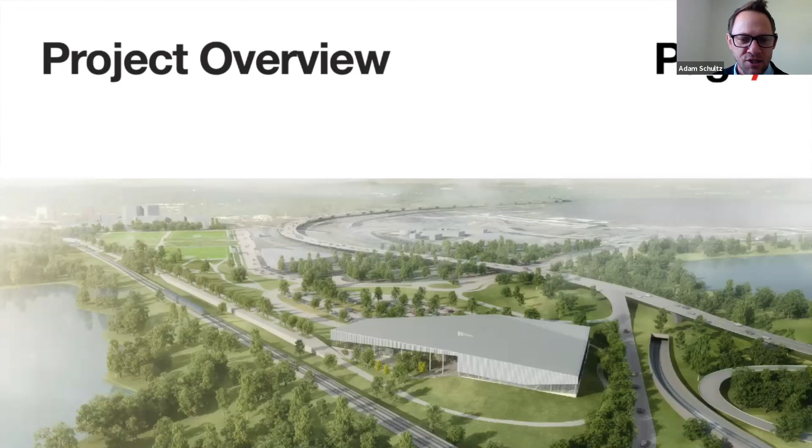Good afternoon, my name is Adrian Lazaro. I am an associate principal at Page and the project architect for the Long Bridge Park Aquatics and Fitness Center project, together with our design partners, MJMA from Toronto, and a great consulting team that includes Elliott Bryan, AMT Engineers, Hillis Carnes, Roadside Harwell, Schnabel DC, Limbach, and Water Technology Inc. We at Page worked closely with Coakley Williams as part of the design build team to deliver this very exciting project to Arlington County.

The project started with the owner's project requirements and a set budget. From there, we worked hard to provide this iconic facility, meeting both the project requirements and the limited budget, all in a very simple yet elegant design.

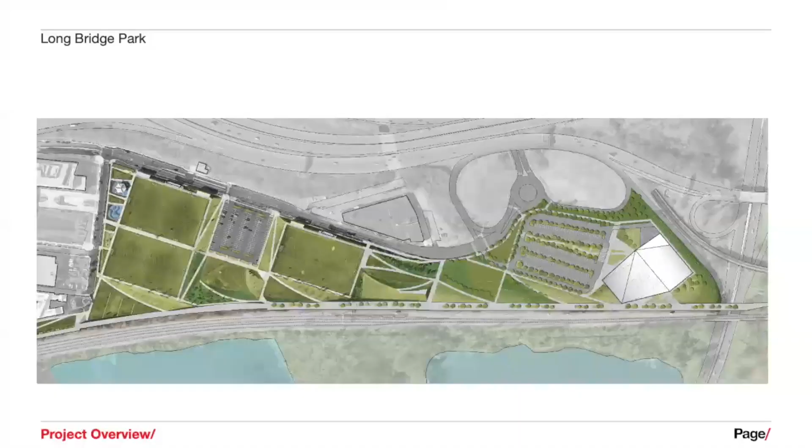The facility is situated at the north end of Long Bridge Park with approximately 92,000 square feet of floor area. It has a 50-meter FINA regulation pool at the north end of the building, perfect for everyone, from those who want to do laps to aspiring and current Olympic athletes who want to train. It has seating for more than 400 spectators.

Next to the pool is a spa for those who want to relax. At the south end of the building will be a leisure pool with a slide, a lazy river, and play equipment for users of all ages. It will also have a lap area in case you find the 50-meter pool too big.

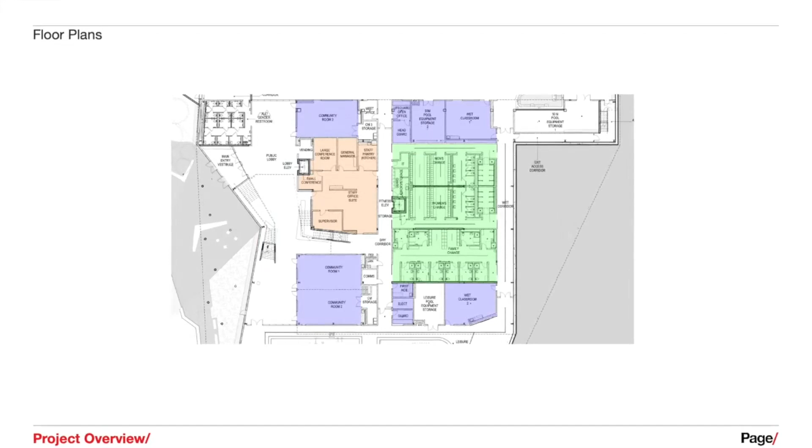In between these two pools are the admin area, change rooms for men, women, and family, pool support such as lifeguard rooms, storage, first aid, two wet classrooms, and three community rooms where you can hold small conferences, seminars, or parties. All three areas are connected via dry and wet corridors.

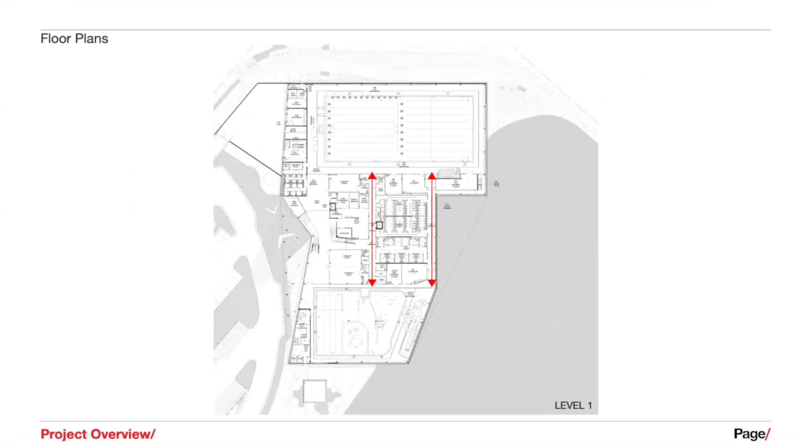Above this middle part of the facility is a fitness area which overlooks the leisure pool inside and views towards Reagan National, Crystal City, and the Pentagon outside.

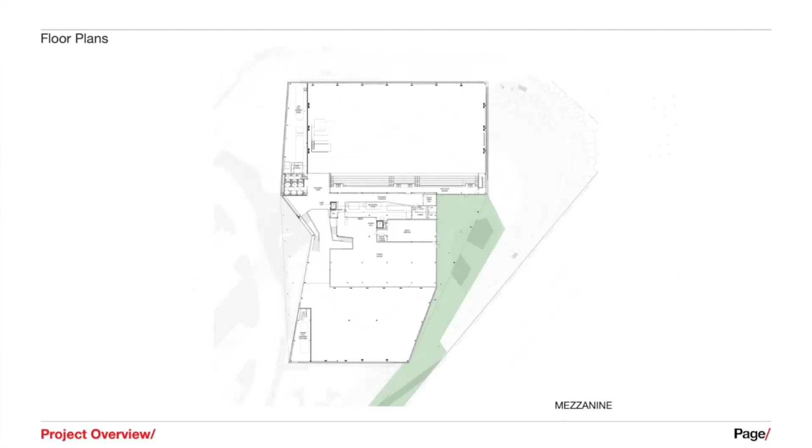The facility is an extension of the existing Long Bridge Park. While making that connection outside, we also brought it inside from the Esplanade to the Esplanade Corridor, where a timeline graphic and the rich history of Arlington County and Long Bridge Park will be located.

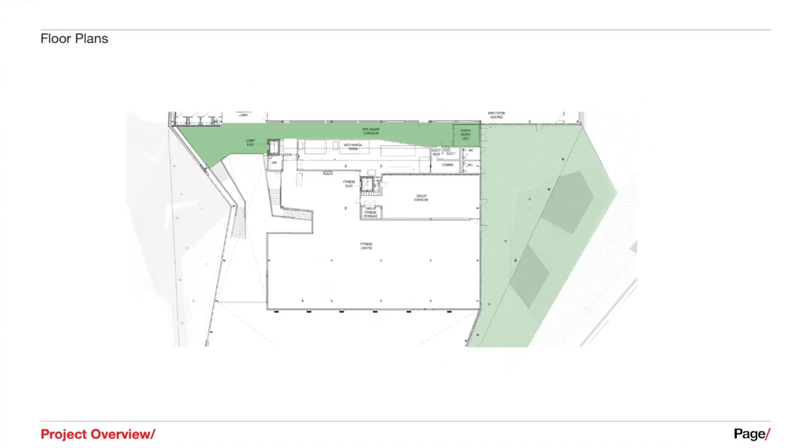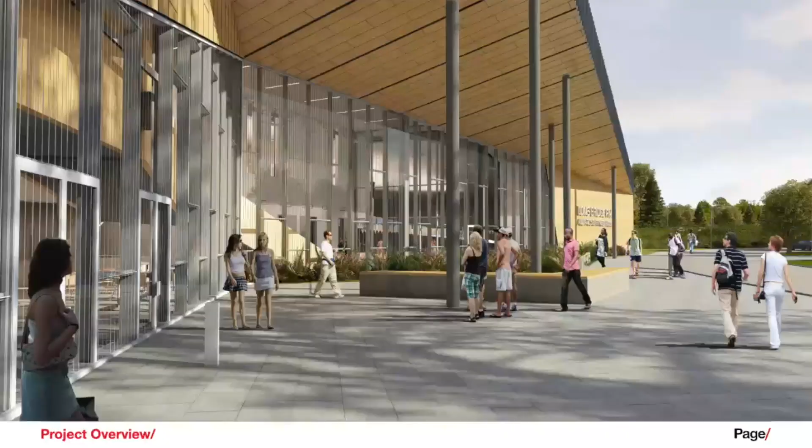The building materials used are very durable, simple, and aesthetically pleasing. At the exterior, we have predominantly metal wall and roof panels, with phenolic panel accents at the main and Esplanade entrances. The glazing is treated with fritting in a pattern that makes it bird-safe or bird-friendly glass. Yes, we did think about our little feathered friends in the design of this facility.

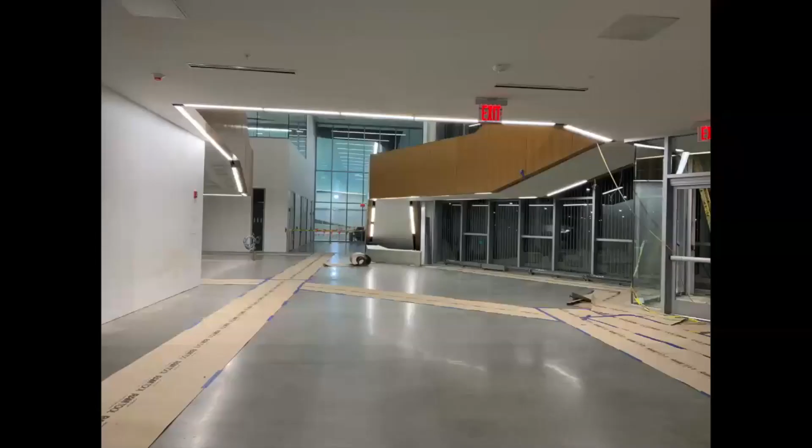Inside, we have barely any veneer finishes. Floor is mostly concrete, polished or brushed. The group exercise and fitness areas, though, have wood and rubber respectively to make it easier on users. Walls are mostly painted or exposed concrete. We have a few areas with tiled walls, such as the shower areas and all-gender restrooms.

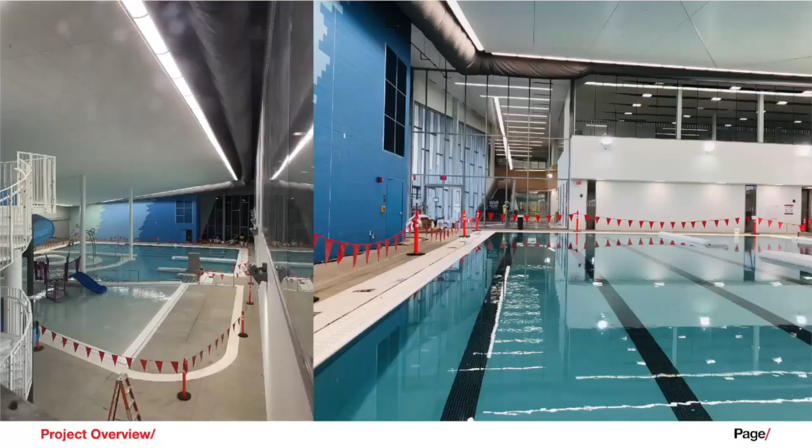But it's not all about aesthetics. We also had to take into account the humid and somewhat corrosive environment in the pools. That is why we have fabric ceilings and fabric air ducts with aluminum hard duct connections, for example. Exposed steel is galvanized or applied with high-performance coating. We also thought about limiting the effects of the corrosive environment by addressing air quality through the HVAC system.

You see, pools, when used, generate this noxious gas called chloramine, which is a reaction caused by the chlorine in the water mixing with ammonia, which comes from our bodies in the form of sweat, oils, and other liquids. That gas formed on the pool surface is heavier than air. Old pool designs had to return air low across the deck. But guess what? Trying to move that gas across the deck is basically ineffective, as users walking along the deck would disrupt airflow and make the gas go airborne.

That is the pool smell you smell in pool facilities, the same smell that reminds you of summer. So we source-capture that gas at the edge of the pools via the gutter evacuator system, and it is exhausted out of the building and not recirculated, because we know that better air quality means more fun for everyone.

So there you have it, the building in a nutshell. We are really excited about this project and we take pride in being part of making it happen. We look forward to seeing you enjoy this facility in the near future. Thank you so much.

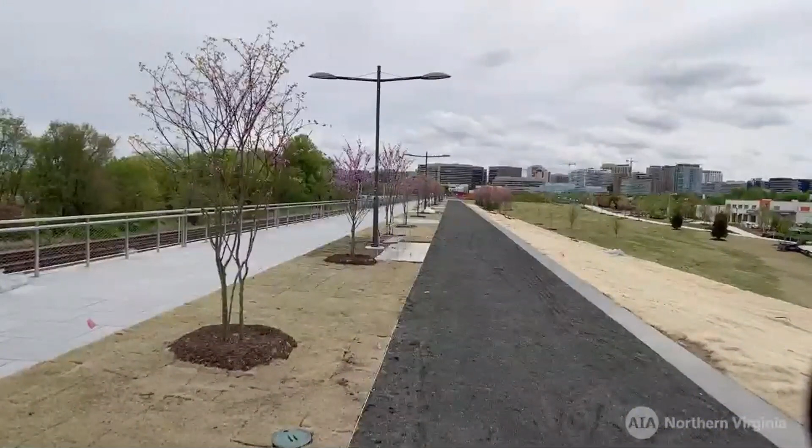What we had heard from the Long Bridge neighborhood committees was they wanted more park. They were excited about a building being here, but they wanted more park, and they wanted a passive park. The existing park is all about soccer, play fields, and noisy activities. Folks wanted to watch birds because of the association with Roach's Run. They plane watch, they train watch, and on some nights you get to watch fireworks, I suppose. So it was all about more passive engagement.

The idea was that there is no barrier between park and building, and the park seamlessly moves its way into the building. We saw that entrance as important as the front entrance because a different group of people will be coming in there—bikers, when they finish the overpass for pedestrians, that will connect both the District of Columbia and the George Washington Parkway.

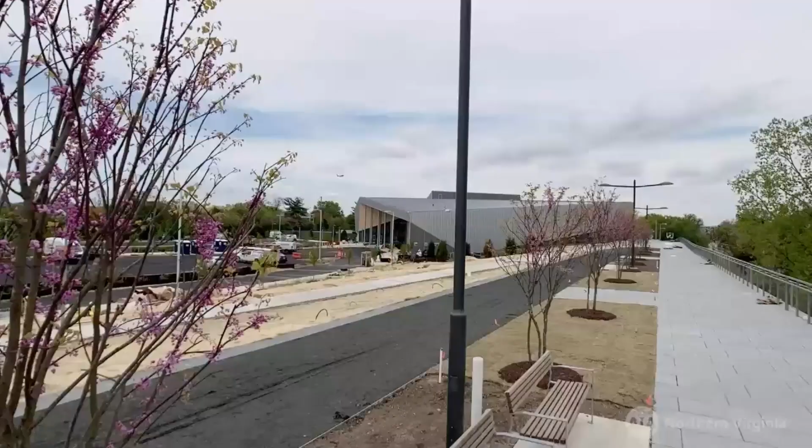When folks come in off of the Esplanade from way down at the other side of Crystal City, they just walk seamlessly and are guided, literally guided into the building by the landscape. It was a big driver in terms of both the appearance of the building and how it sits and nestles in. This place where we're standing is the Esplanade.

It's a very nice open space under a huge canopy. It connects to the park. There's a jogging trail, and you can see planes land and take off. It's very breezy. This is the favorite part of the project, for me at least.

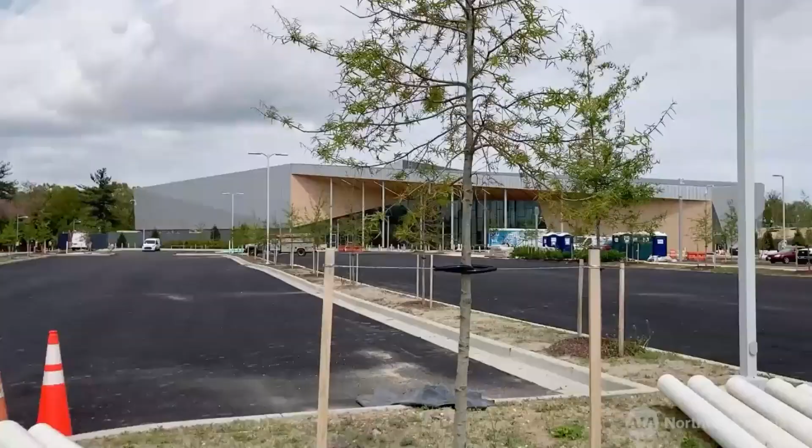Actually, it's when you drive in, the overall feeling that you get from the building. Because it sits away from you, there is a sense of entry. When you actually turn into the park and your car turns this way, you get to enjoy the building as you come in from far away.

The building has a lot of large-scale elements, and so while you can appreciate them up close, they really read when you're far away. You really get to see how we've pushed this front entry in so that you could enjoy the scale of the building.

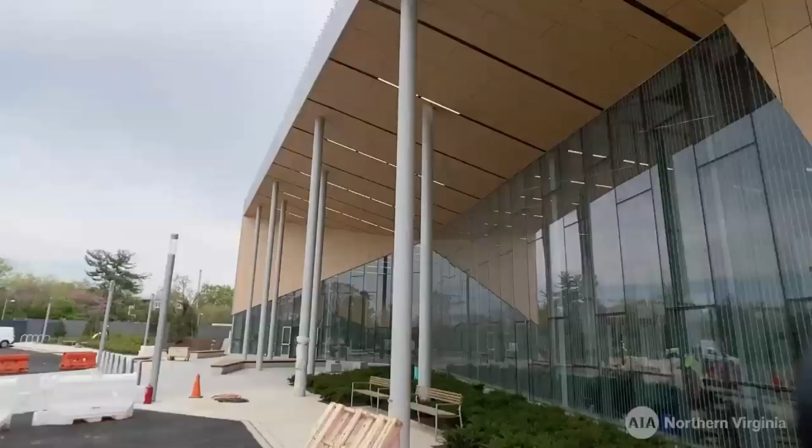There were early discussions about what the project wanted to be. But this was not really about architectural design—it was more about finding something that would resonate with the county. We knew they wanted an iconic structure. It's in an iconic location. We knew they wanted a civic feel to the building, and they had a lot of program that they needed to enclose.

We were walking the old site, but what we noticed about the existing park was that because they're playing fields, they're flat plains—not rolling hills. Everything was sort of in flat plains. And that gave us the inspiration for this idea.

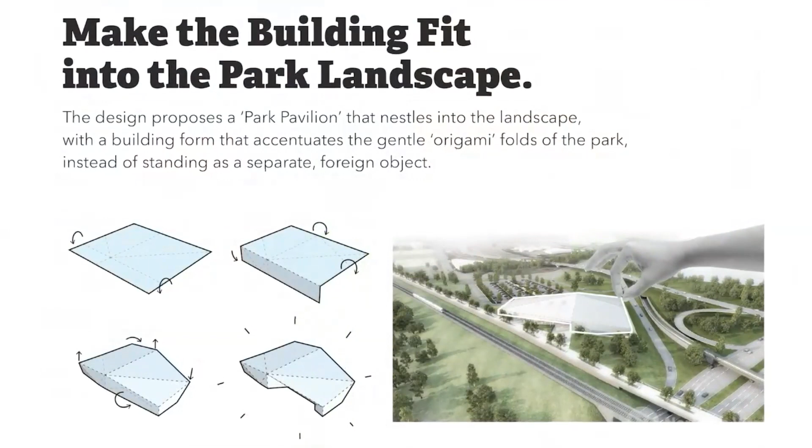They chose the notion or the metaphor of origami. For me, it was tessellated planes that we could pull the building up and out of the ground. So all of the geometry is really based on the building being a part of the park and sort of rising up out of the park. So the tessellated part, the origami piece, is important in the form of the building.

It guided everything—the shapes, the folds in the panel—what they're trying to do is recall the notion that it's being pulled out of the ground and being folded as it forms this large volume that holds both of these swimming pools.

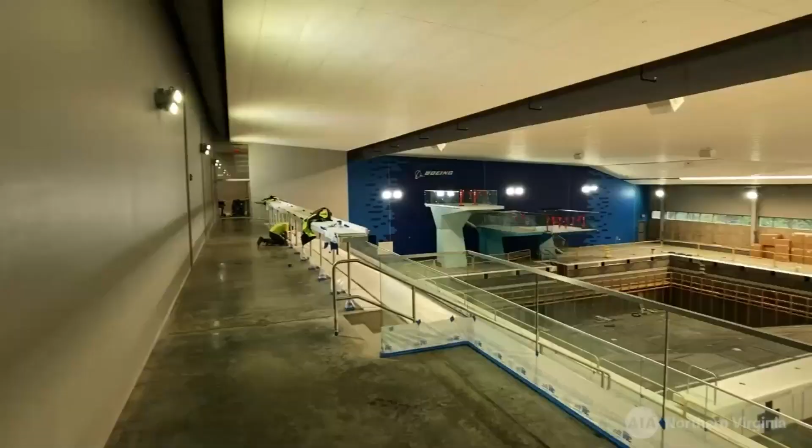With the pools, there's always another layer of complexity dealing with the exhaust systems, the finishes, just making sure everything you're putting into it is right for that environment—the chlorines and everything else. I thought that was an interesting part of the project. We worked very closely with MGMA, our team whose primary focus is pools, having discussions with them about how this finish might not work here because of the pool environment. I thought that was a very interesting part of the project that I definitely learned a lot from.

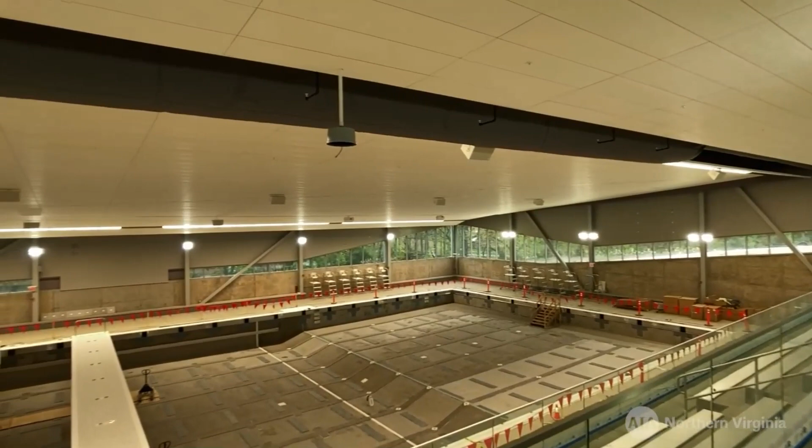I hope that it's a welcoming building, a building for the community. It's a community space—there's plenty of community spaces inside, community rooms, the fitness center, the outdoor areas connecting to the park. I would really love having the public embrace the building as part of their community and utilize it in their everyday life.

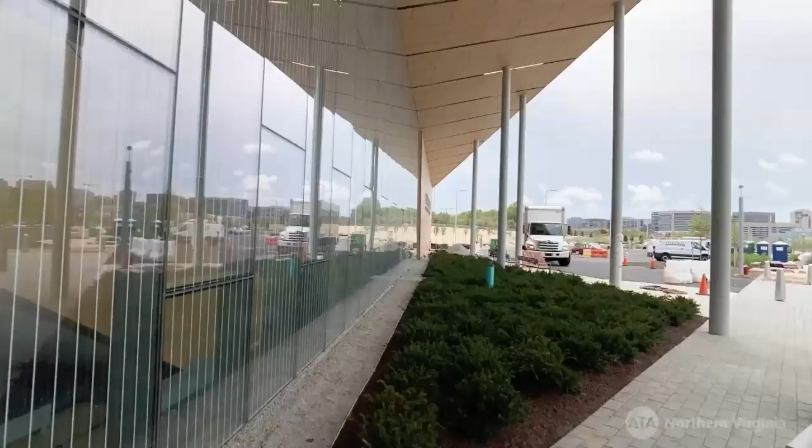If you look at the geometry of the building, there's a couple 90-degree corners, but not that many of them. Trying to get all of these to work with the metal siding, the phenolic panels, the curtain walls was a challenge, dealing with the different tolerances involved with those trades. That'd be a big thing for young architects to note: be cognizant of how much tolerance you're giving your contractor with your details. But we were able to make it work.

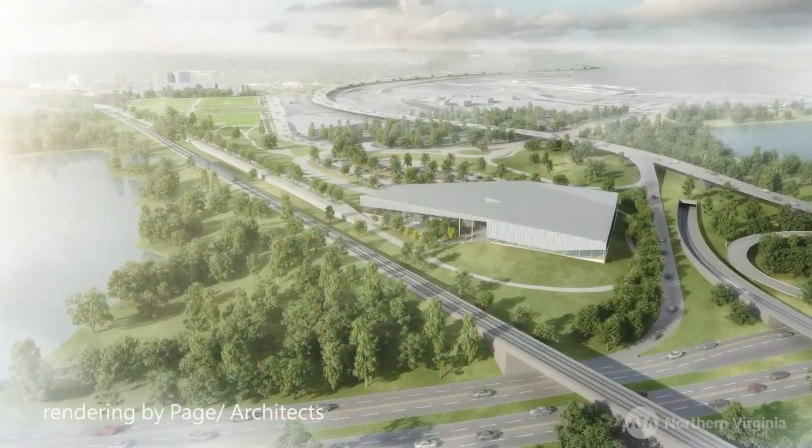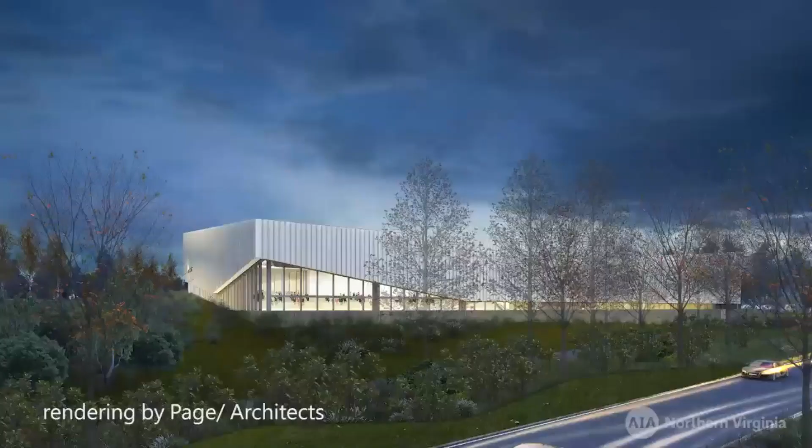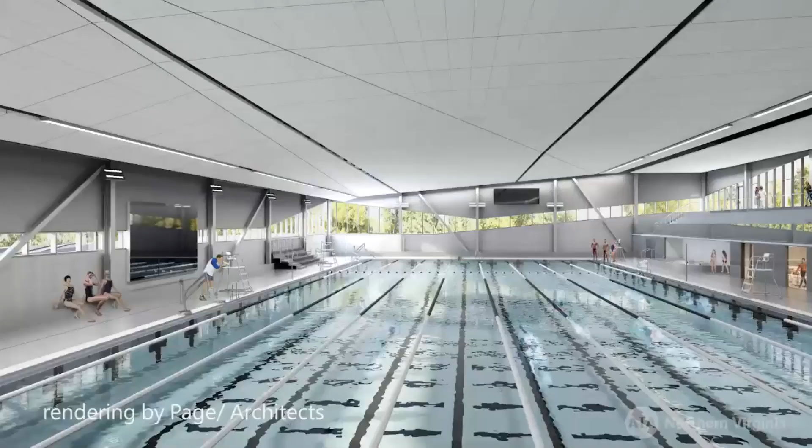The project had a long gestation period. We've gone through several designs for the Aquatic Center in this part of the park development. This one resonated because we wanted as much bang for the buck for public dollars, while making a statement with a modern facility the community could be proud of. It maximized the swim opportunities, health and fitness space, plus amenities like deck space, storage, and community rooms.

We didn't have to shorten or go light on certain things because of the simplicity of the design, yet it's a very appealing design as far as how it sits into the park and the building's aesthetic. What I would hope people would enjoy is the absolute simplicity of the building.

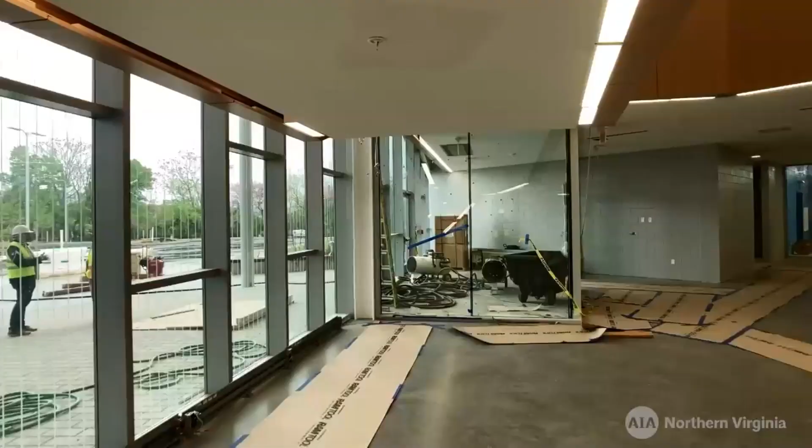There's not a lot going on, not a lot of moves, not a lot of ornamentation. You come through the front door and the entire building just unfolds in front of you. You don't have to hunt for the natatoriums, the locker rooms, or the seating. Everything is just laid out there as you come through the front door.

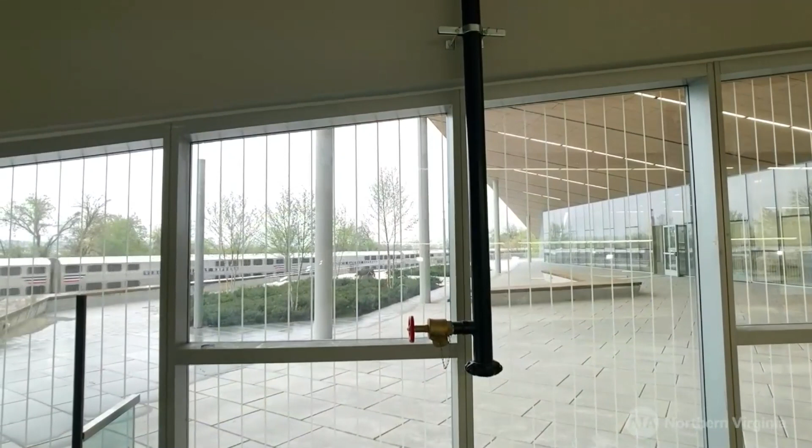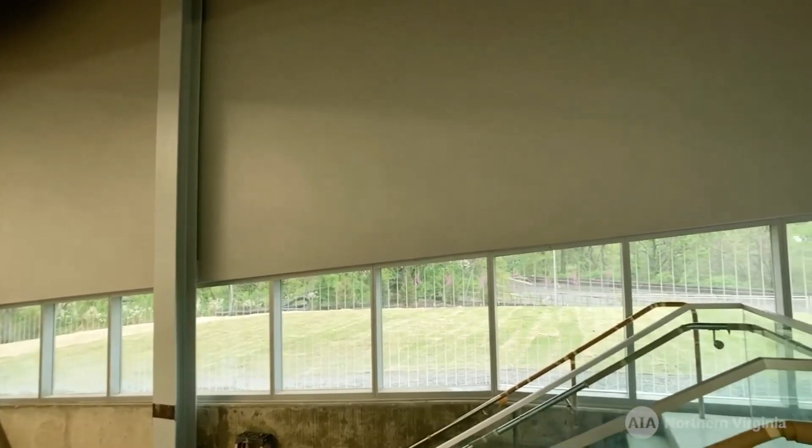There are interesting vistas from inside where you can look out and get a feel for the railroad tracks, Crystal City, the overall area. You'll see the metro coming out of the ground and rolling by, a constant reminder of what the neighbors were asking about. They wanted a building that fit in with their things, so it fits in with the bird watching, the plane watching. You'll be able to observe all of that no matter where you're at in the building.

It's excitement in simplicity. Our scheme is extremely simple, and I think that's where the beauty lies, in its simplicity.

Thanks, well that was a fantastic video. I think we can really get a grasp, Bob used the word beauty, and it really is just a beautiful building.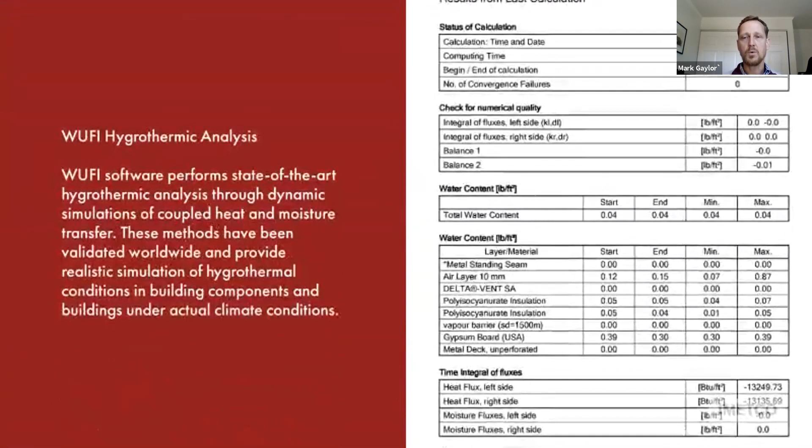Joe, can you go ahead and start the video? We ran hygrothermal analysis because we knew this was an aquatics facility, and they can be very challenging with the vapor drive from the inside to the out, and we're in a colder climate. So the hygrothermal analysis tells us which components are going to work the best for aquatics facilities. We typically do this with all aquatics facilities.

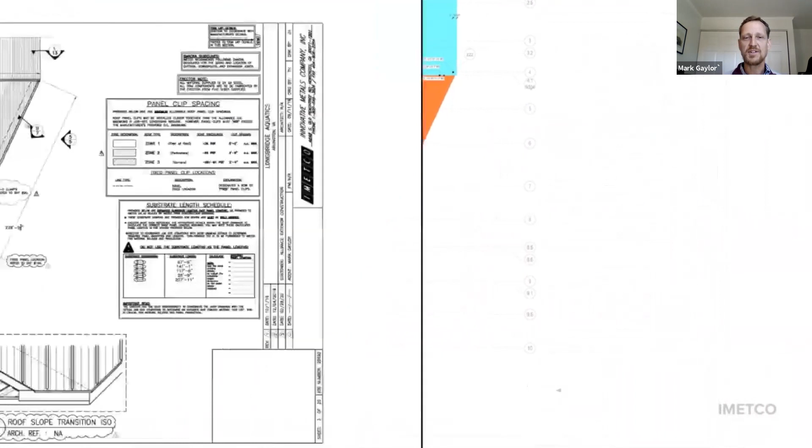So we took the design, and it was great. Page knew exactly what they wanted, which made our lives much easier. They knew exactly how they wanted it to perform, they knew what they wanted. We just basically came up with the details, shop drawings, some of the details.

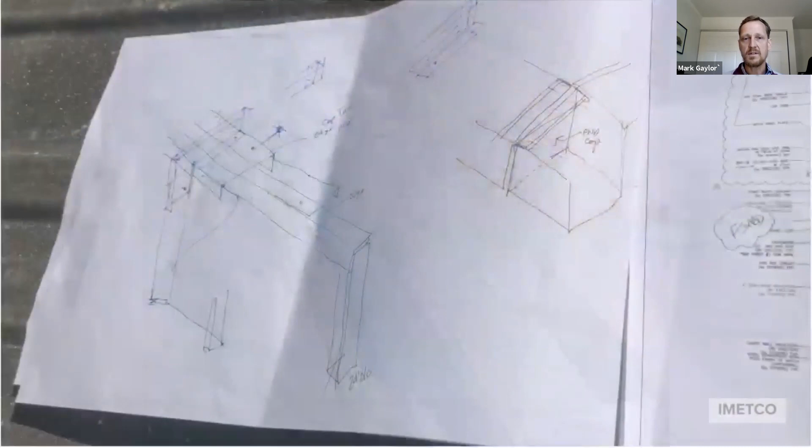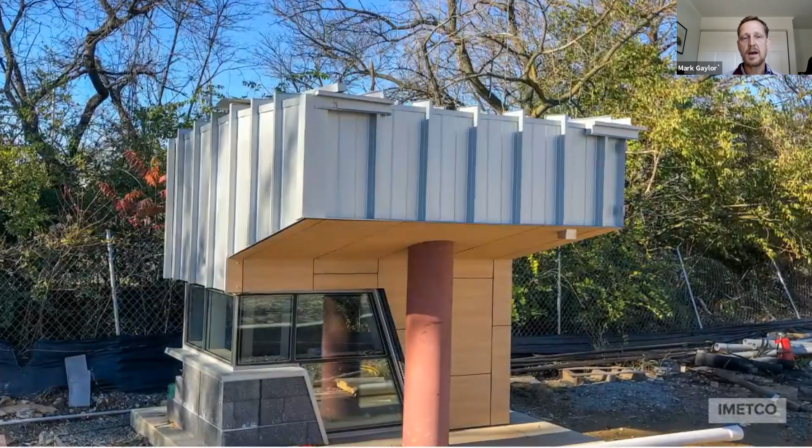This is a detail showing the knee plates making the wall panels tie into the roof and into the internal gutters. They thought even of the details - you can see the internal gutter there has leaf guards in it. Not only is this an enormous roof that captures water in these enormous internal gutters, but they're also considering the maintenance of this, and how they can reduce the maintenance of the project over its lifetime. Many thoughts went into this process.

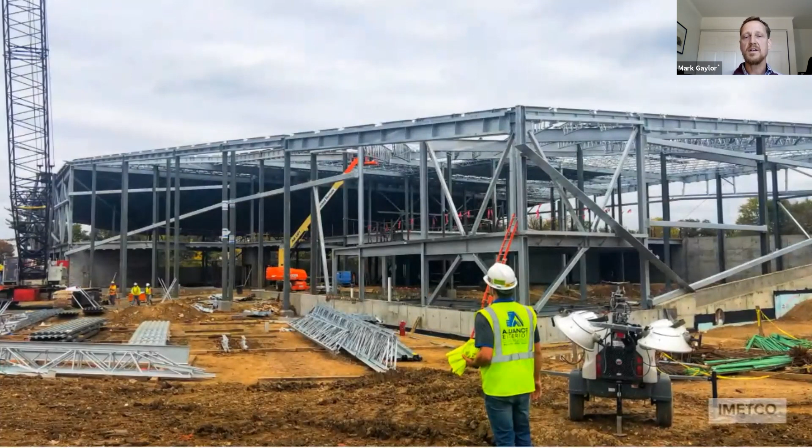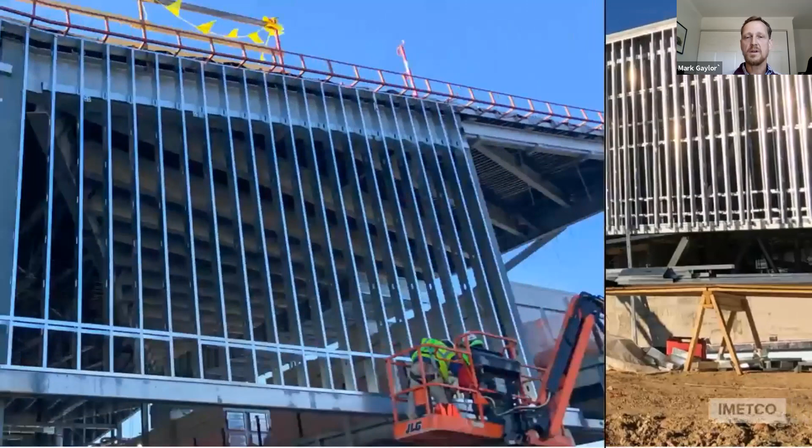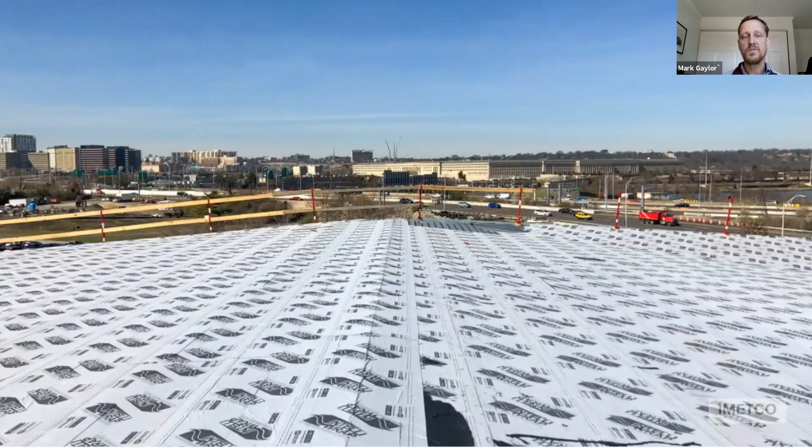Here's some photos from the very beginnings of the project, from the steel going up and the deck being installed. You'll see collaboration. One of the other great things we had on this project were the installers - Alliance Exteriors. They did the exterior fenestration, provided the curtain wall, the phenolic panels, and did the roof installation. That was another key to success in the project. They knew how everything should tie in together, the transitions.

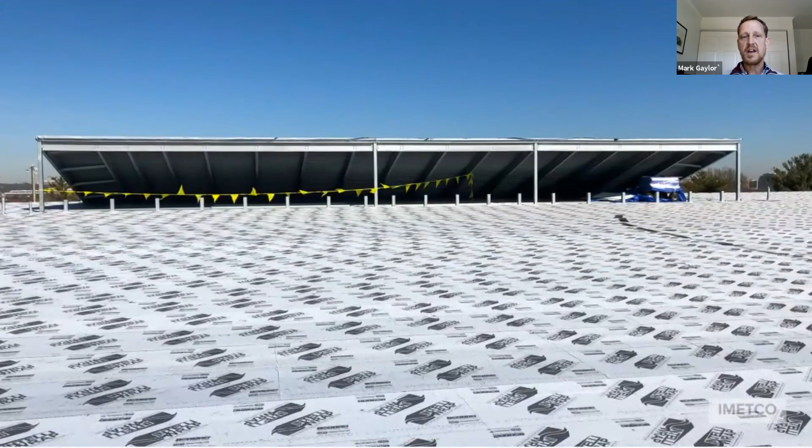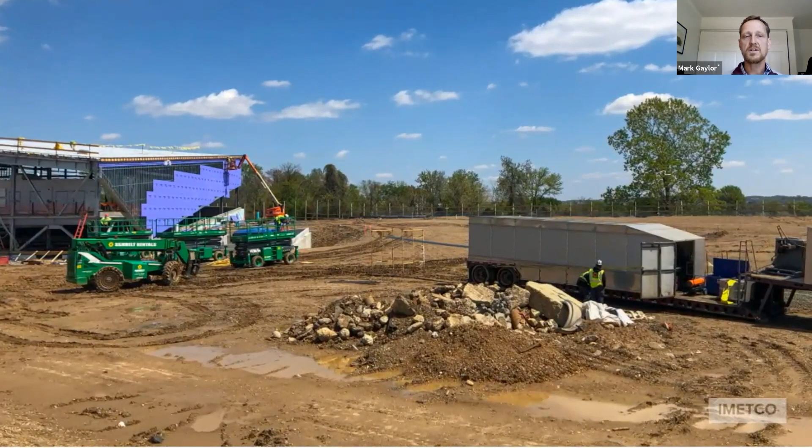Some of the really challenging parts were these transitions at the edges where all these roof panels had to join and meet and line up with the wall panels. It was challenging, but it came together extremely well - lots of meetings, lots of collaboration.

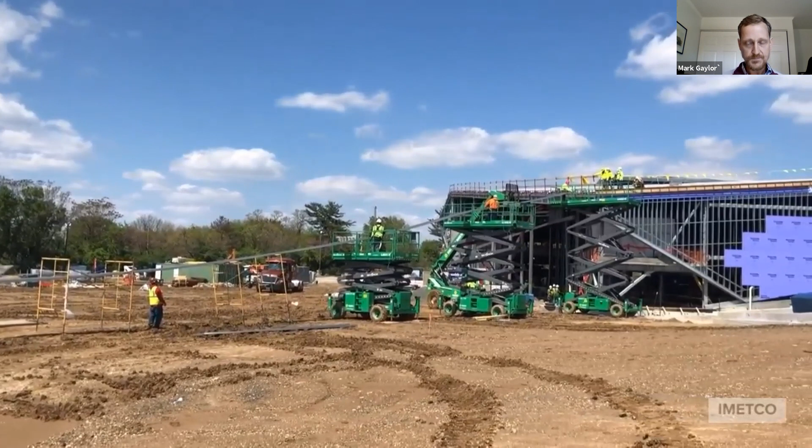As Adrian said, the longest panel in the center of the roof was about 210 feet long. The best way to do that is to basically bring the roll forming machine out to the field and actually form these panels right at the roof. As you can see, there were scissor lifts set up, and the panels were shot right to the roof, which saves a tremendous amount of time.

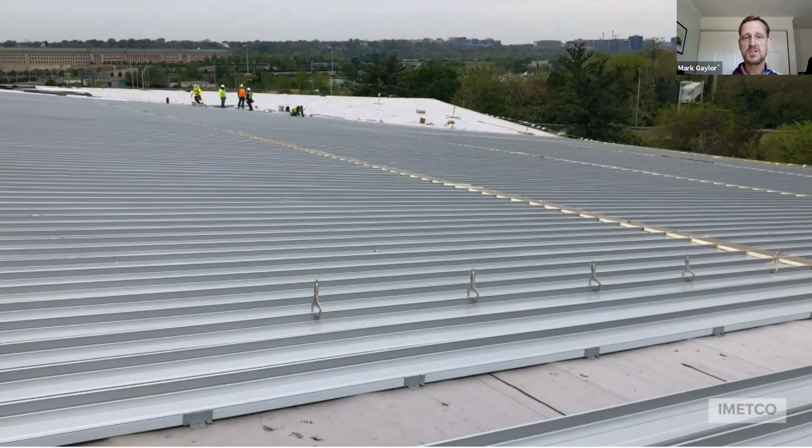In this project, particularly because it was next to Reagan National Airport, setting up a crane wasn't as easy as it should be, so you had to have special permits and special permissions. So shooting them to the roof was a very cost-effective savings and lessened the time installing the metal panels.

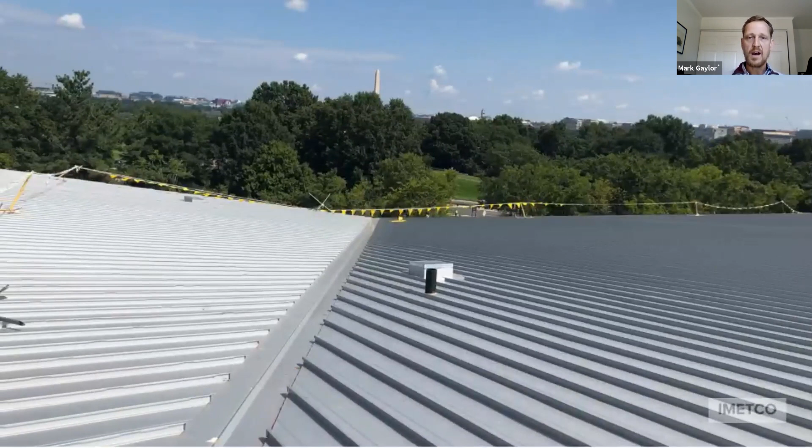Every aspect of this was really thought about in terms of which sections to start the roof, and with Coakley Williams, scheduling and coordination was exceptional - making sure that certain areas had to be dried in first, and knowing how the building was actually going to have to be constructed and how the roof had to be installed.

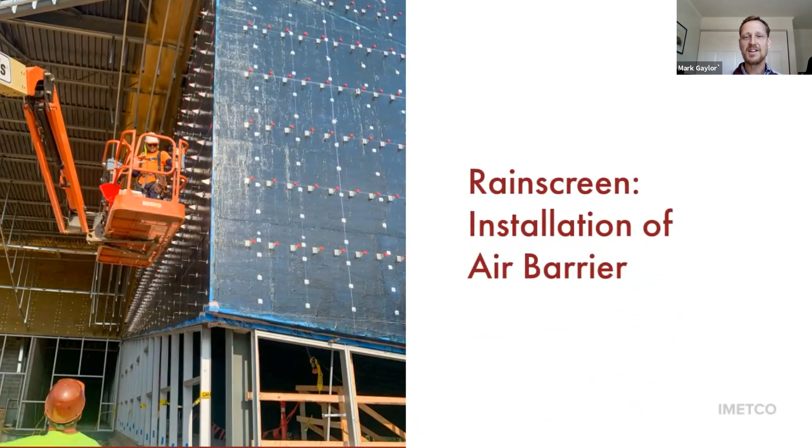You really can't envision the whole building until you're standing on the roof of it, looking out over the Pentagon and seeing the enormity of the project.

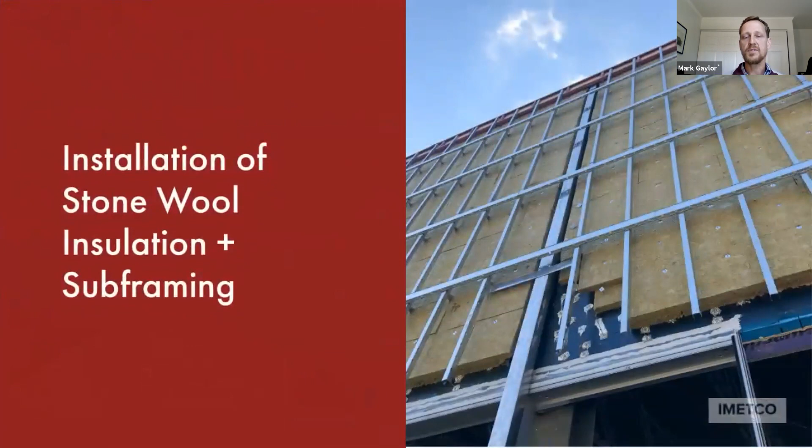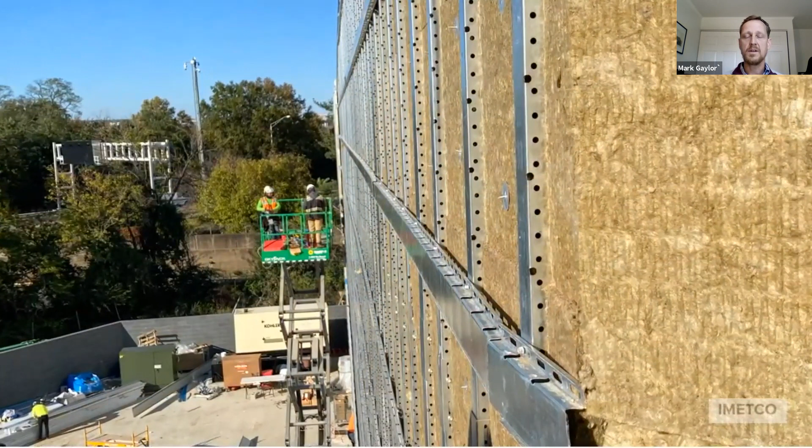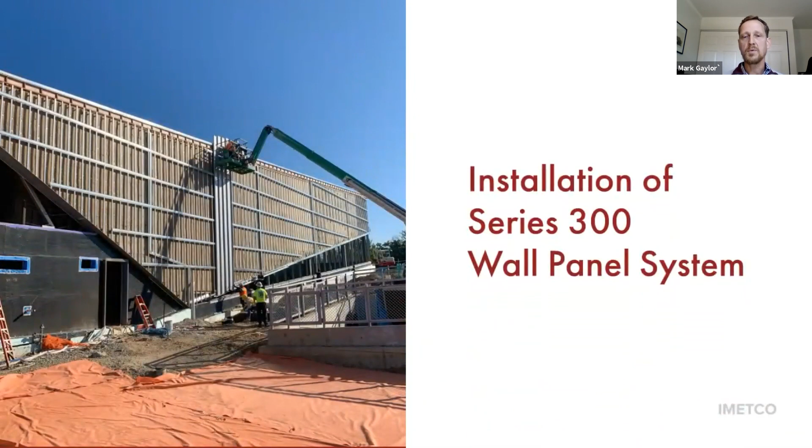All of the details from the wall panels having thermally broken clips to the roof actually having a Z-girt in the inside layer of the insulation to limit the thermal bridging of the roofing system, because there's many fasteners that come through the roof, and if they're left on the exterior of the roof, that thermal bridging happens, and it can cause condensation on the inside of your deck.

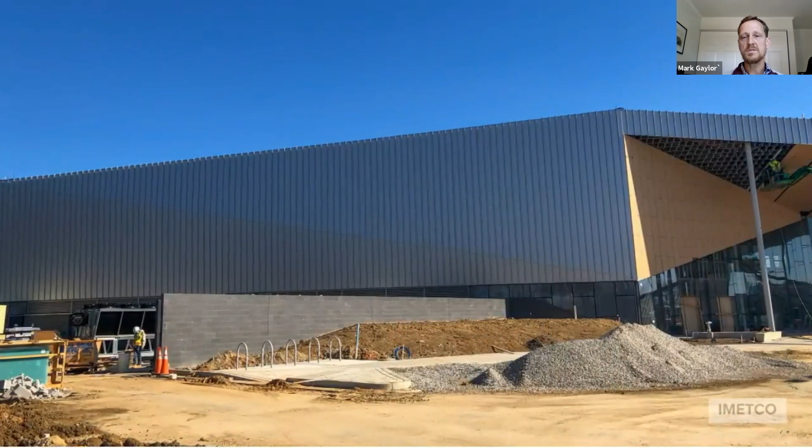Just some of the transitions as they were being installed, through the process, making sure the joints were smooth. Paige knew with the SRI value, this particular finish on the roof panels, they wanted a 3-coat extra protection on the panels themselves with a high SRI value. So they chose our platinum silver in a 3-coat finish, and it turned out exceptional.

Just some of the finished, or close to finished, photos here. So I just say exceptional job, Paige.

Thank you. And I wish to add, Adam, we had Mark here for this panel discussion, but our efforts were not limited to Mark's metal wall panels. It was the same with the curtain wall manufacturer and the phenolic panel manufacturer and installer, and of course with Coakley Williams. So it was a great team effort to make sure that the design intent was respected and actually achieved. Yeah, it was definitely a team.

I think it's really neat in these design build projects, from my experience, to be able to work with people like Mark, and really so much earlier on in the project design really helps to make these work well, because you can just coordinate all the other details around it. And I'm sure EJ helped with that process a great deal too.

He did. So we're getting close to time, so before we take questions, there's not a lot of questions, but if people do want to write questions in that Q&A, I see one so far, please do so now, and we'll start to ask those of the panel.